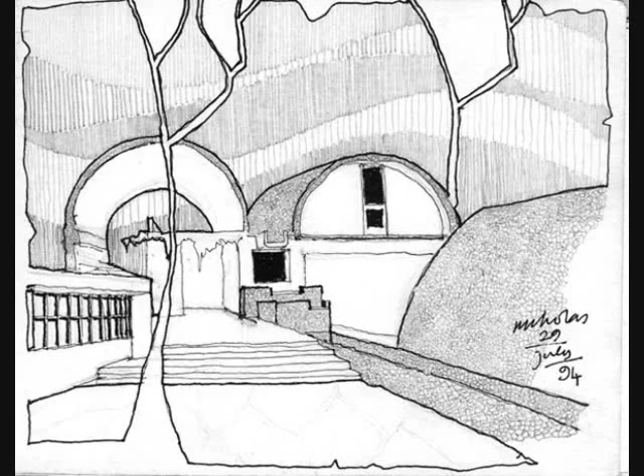The original sketches for this institute perpetuate the ideals of one of the greatest leaders in contemporary Indian history. It shows a long plinth base with walls emerging from it like huts on a stone plateau. The institute captures Gandhi's great strength and his realization of the enormous power that comes from simplicity and calm.

The constraint of irregular side boundaries and expectation of an institution altered the original vision, but the elemental sense of it has come through in the final design.

The space was divided into offices for directors and assistant directors, reception, exhibition spaces, boardroom, general staff offices, seminar rooms, computer room, library, auditorium, dining hall, and a cluster of residences across.

The entrance is approached by a series of steps and terraces from the outdoor amphitheatre at the back of the site. It has a square central courtyard that gives the various spaces cohesion.

The entrance is hidden from the front gate, and the court is used for arrival by car, gradually passing through a misting fountain used to defray the heat, which helps to cool the air nearby.

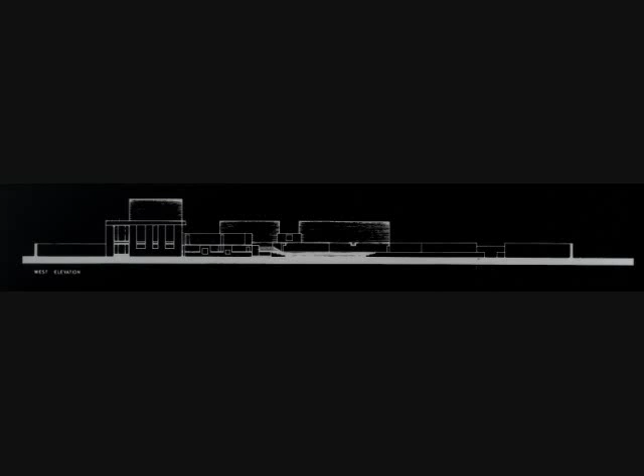The duality of the building within the building is like the body and the soul. The effect of slowly ascending onto a platform through a long defile, down a generously scaled dark hall, and finally coming out into the light at the middle level of this courtyard, is memorable.

The director's residence and 20 living units, arranged 10 to a floor, are clustered behind it around a small triangular courtyard near the southern perimeter of the site.

Looking south across the institute, the importance of the different open spaces can clearly be seen, like terraces, courts and amphitheatres, an intention to tie the entire property together as an urban complex. It has an axonometric site plan.

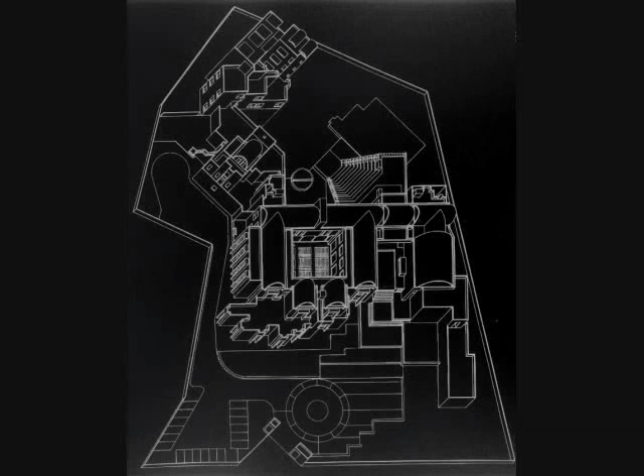It combines an irregular site with regular square forms and outside with inside spaces, achieving a harmonious sense of unity. The walls are covered by glazed ceramic pieces. The court was created as a geometrically ordered replica of nature. It becomes the focal point of its residential component.

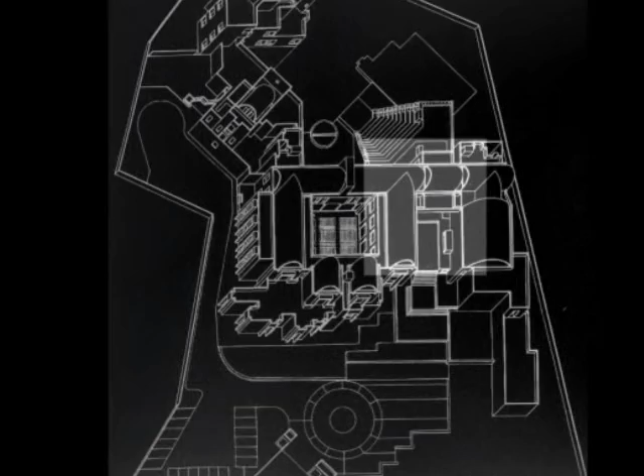The open-air amphitheatre, a favorite component in many of Doshi's designs, sets up a diagonal axis which opposes the approach from the main gate to the entrance at the northeastern edge of this natural mirror image.

Landforms have been subsequently manipulated to create a bowl-shaped perimeter around the garden, with slopes carefully planted to establish a feathery green fringe. Internal courts, recessed window openings, deep eaves and balconies all bring shade to the surface of the building.

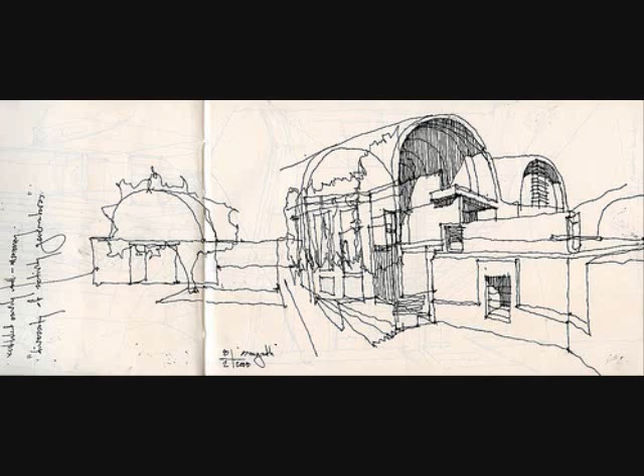Terraces in the stack housing units overlook the garden. Original sketches and models show an intention to use a vaulted roof here also, but these were finally subdued to take advantage of the mass strength of flat cornices.